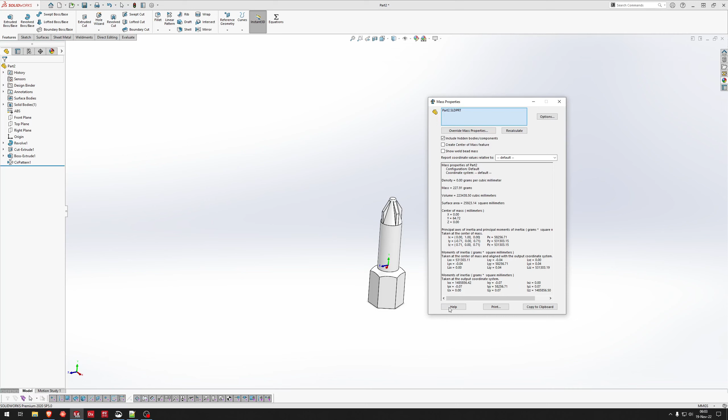3 minutes to solve that model, not too bad. One thing I just noticed within the print is this callout that either solution works. So this tells me I can either make this outer face revolved, which is what I didn't do, or I can do the simpler option of revolving this main central spherical, cylindrical, and conical section, and then add in these as just little boss extrudes.

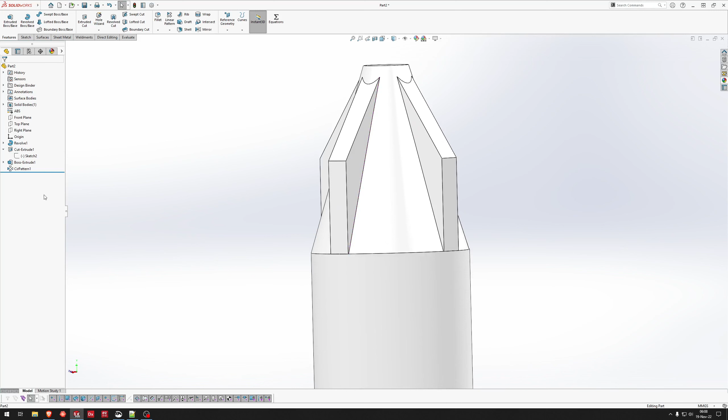So if I needed to go back and do this right solution really quickly, one way we could do that is if we go back before our circular pattern, we can do an insert delete face, which I have on my S key here. I can pick these 3 faces, and that cleans that up, so we hit right click. Now we have that cylindrical face, which better matches the print here.

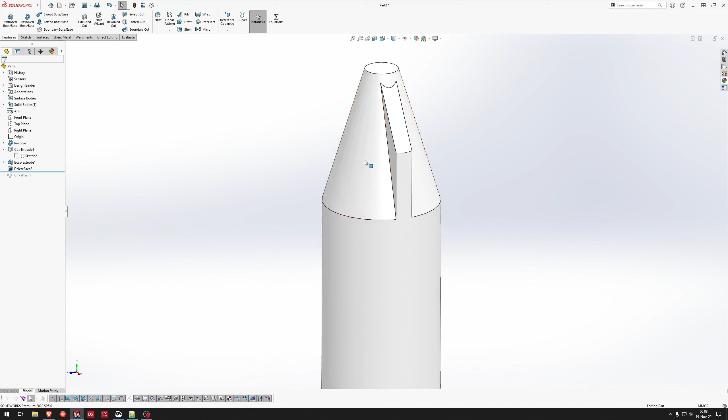So if that's something we wanted to do, we can. The important thing called out is just the distance between these 2 faces, and then if we roll forward, we can have that delete face be also part of our features that we pattern around. So we can do it that way.

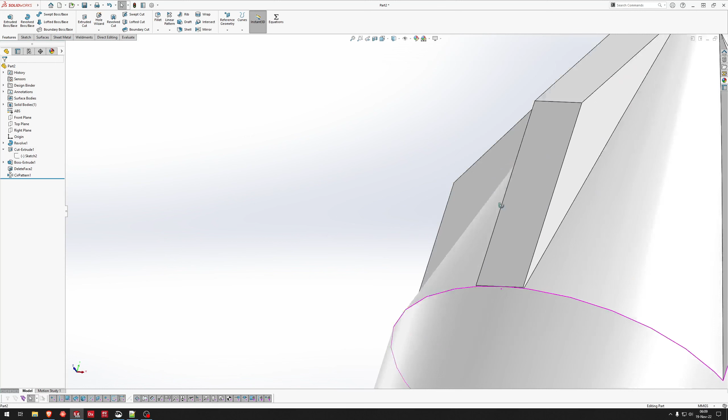Again, our mass properties end up being within 1 gram, so we have that tolerance to work with if needed. Let's see here, it doesn't look like it wanted to pattern that. Maybe I need to do a geometry pattern. Let's do that. There we go. Mass properties, again, just lowered by 0.02 grams, so not that big of a deal. Even if we didn't notice that in the print, it's small enough that it doesn't matter too much, but that's how you'd solve that in that case.

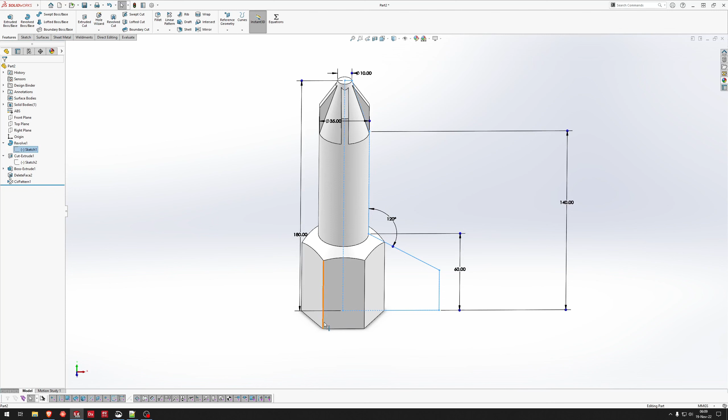Otherwise, this print was fairly straightforward—pretty simple revolve and a cut extrude. The thing with the revolve, something I picked up from one of the other practice models, is I really like over-extruding here when I have a hexagonal base and otherwise revolved feature. It doesn't have to be hexagonal, it just has to be something from the top view or another view that we're cutting away—just over-extruding, making too much material, and then subtractively taking away everything.

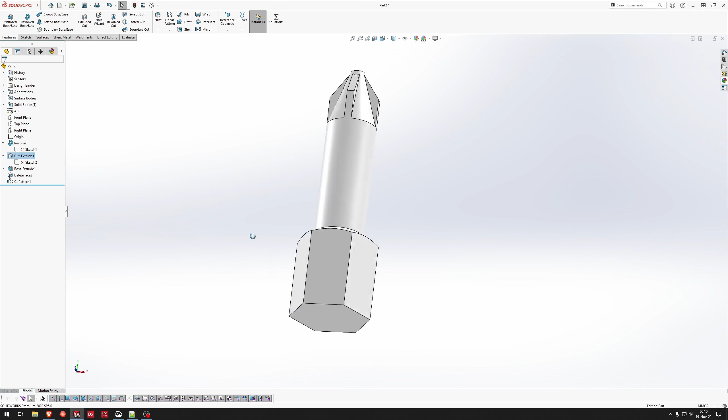The handy feature here is the cut extrude flip side to cut checkbox. This way it doesn't cut the inside of the material or the sketch profile, it cuts everything on the outside of it, which is really handy in cases like this where we have this big flange or base on the bottom of something that's otherwise revolved. So that's really handy there.

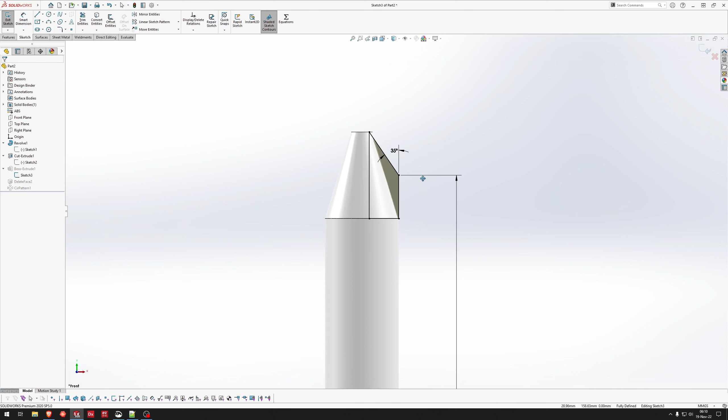Then again, just mid-plane extruding a couple of ribs. If you notice there, I had a couple issues with the relations, just making sure you pick up on the right relations. I didn't have to make this coincident to the origin, just needed to make it coincident to the top. Otherwise, we should be all set, and making sure I picked up the right dimension so it didn't give me a rebuild error.

Overall, pretty straightforward part, pretty simple to solve at the end of the day, but I think we can do a little bit better just by making sure we have our right constraints on this sketch. So I don't think we'll shave too much, but let's give this another go.